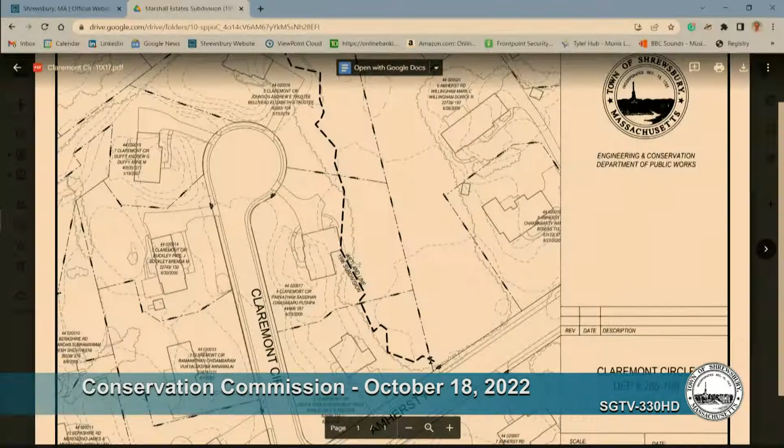So this is basically off the town GIS, but this wetland line, I found the original Mylars, and it did show that this is the wetland line on the original subdivision. They did do an order of conditions for the subdivision, but clearly they never came back and did orders for any of the houses, because you can see this is their house. In theory they would have filled wetlands to put it in, so I would say the original developer, if anyone was involved, didn't come in 1996 and get NOIs for the individual parcels, but the wetland line kind of follows what's out there.

Was there any instruction about a rock wall back then? No, there really wasn't a lot. The order of conditions talked a lot about wetland filling to build the subdivision and wetland replication, but there wasn't anything for this.

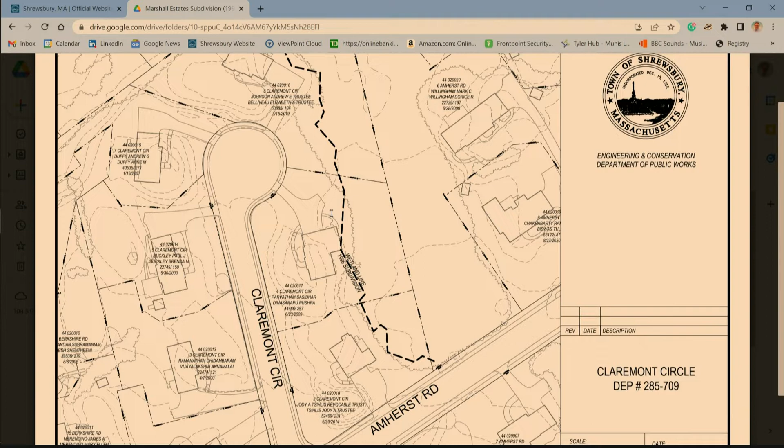Amherst Road actually crossed a wetland at the end of it. I think this was part of the Marshall Estates subdivision, and there were a couple of wetland fillings to put the roads in. This was recorded in 2000, so at this point I don't think there's been any further encroachment since the house, based on the aerials too.

So at this point, if we're going to make them file after the fact, we should really make number 2 and everyone else do it too, which seems a little excessive for 25-30 years ago. But is the current wetland line delineated with any rocks? Wasn't there a rock wall? Well yeah, number 8, they put in a rock wall, that's up here.

This actually matches very closely to what I think they delineated in the field, because if you recall, their swing set was right off the corner here, so they just clipped the corner of this wetland right here. So on this particular parcel, does it make sense to somehow permanently mark it?

I think we should make sure there's no further encroachments. There's already a wall at the edge of the clearing of the trees, but we might want to put our typical boulder requirement or some kind of marker to make sure there's no further encroachment.

Do you guys have any preference as to what? So you already have stone walls there? Only partially though. No, the full area has stone walls throughout our border, for the entire rear interior. And the wetland is on the opposite side, correct. The filing that we did will show it's full of stone walls from the original construction. I think Andy's saying the stone wall wasn't where that line is, though.

I can go out and verify if it needs filling in, if we want to make that a condition. Yeah, at least we should definitely make sure there's no further encroachment. The stones aren't just little things that can be moved, there's a substantial wall, but I'm happy to go over there and take a look, because I don't remember off the top of my head how far the wall goes.

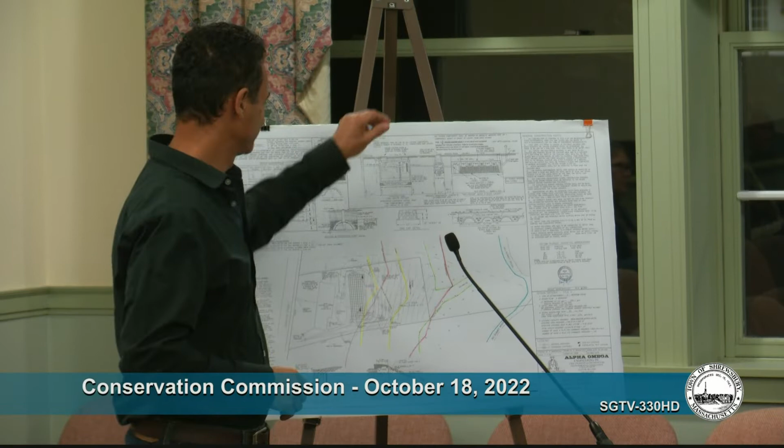Ready, John? Okay, 27 Bayview, here tonight? Anyone from 27? No. Looks like we struck out again. 314 Prospect Street, is anybody here? Andy, no one is here to represent 27 Bayview.

Okay, so 27 Bayview actually has a current order of conditions. That was for an addition to a house that came to us in May. I went back and checked the video, and we did ask them about the trees on the slope, and they said they weren't going to take them down. So I don't really think it's appropriate to do an RDA. They should probably modify the NOI if they want to now take all those trees down on the slope.

So you're saying right now there's an active order, they came in May for an order of conditions to put the addition on. Are you saying that they should amend it? I think they should, yeah, if they want to take all those trees down on the slope, because there's a fair number of trees. So rather than doing an RDA for this, I would issue a positive and have them amend it. I agree. Is everyone in favor that they amend it?

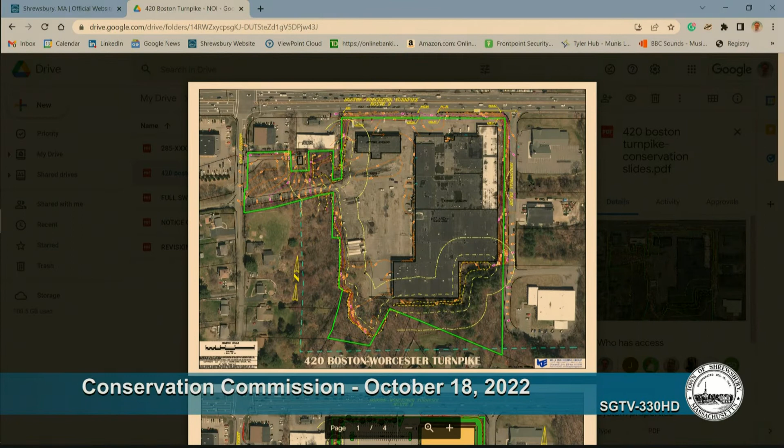I sent some slides in just to show what the project is. The property's located at 420 Boston Turnpike. Access is from Route 9 eastbound or from Oak Street. The property is about 13.5 acres in size.

Currently houses 2 significant buildings—one larger building's about 218,000 square feet, smaller building's about 14,000 square feet. Currently there's about 4.75 acres of pavement and approximately 250 lined parking spaces. McGovern Automotive Group has purchased the property, actually probably around a year ago, and we started working on the project.

We can flip to the next slide. We started working on the project to raze about half of the large building and the entirety of the smaller building, and place McGovern Collision Center in the remaining portion of the building.

At the time we started working on it last winter, you'll see 2 buildings on the plan. The lower one would be the McGovern Automotive Collision Center that has been there for a while.

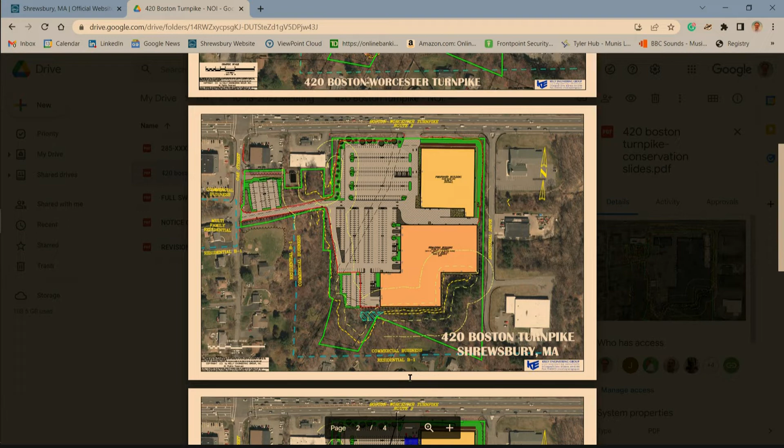Our first plan had left a retail pad, just a gravel or grass space, and Floor & Decor came along in the spring or summer, I don't know exactly when, and we've revised all of the documents. I think we were here maybe for an RDA just to do some demo. The commission said file an NOI for that, which we decided—just file an NOI for the whole thing.

So the project as redeveloped—again, the property is about 13.5 acres. To redevelop the project, we were able to do a few nice things and pull some pavement back. It's an impervious reduction at the property. A little bit less building, but there's a little bit more pavement.

We've shown all the buffer zones. We did get the comments from Graves Engineering working with the planning board, and also comments from Andy working with the Conservation Commission. We've been able to make a little bit of progress on some things related to stormwater management and what we were going to do. We had proposed something, but why don't we talk a little more about it before we get to the next slide.

The property has some wetlands out by the street that are shown. What's on this plan is the wetland delineation, the 30-foot no disturb policy, and the 100-foot buffer zone. On the left side of the upper parking lot toward Route 9, we have some buffer zone work. Down at the bottom of the page, there's a wetland that appears to be the legacy of poor grading or poor construction. When the building was originally built, water ponded against the building, and there are wetlands within maybe a foot of the building, maybe closer.

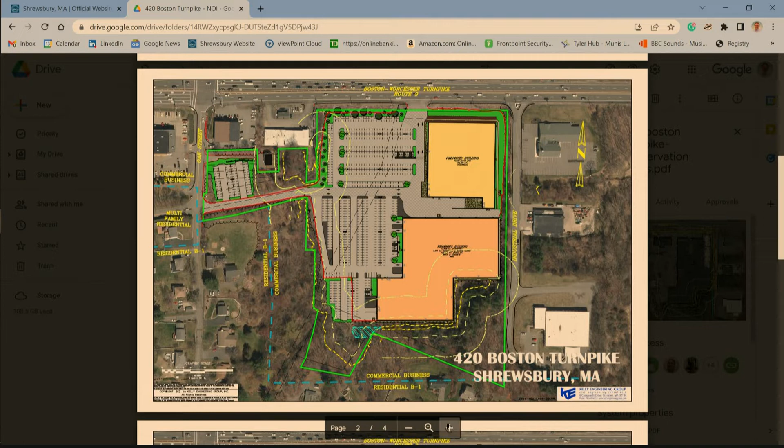If we go to the next slide - there's a redevelopment project: knock 2 buildings down, leave half of 1 building, and build a retail building. The site's going to get fully redeveloped. There's some significant town drainage coming through the site now. The site will get completely redone - it won't be all regraded, but all new drainage will connect into the existing drainage and will ultimately be in accordance with the new local stormwater management bylaws, a significant improvement.

If we can go to the next slide - when we first filed this, we were going to try to mitigate one of the things the local bylaw strives to get, which is phosphorus reduction, which we can't get in water quality devices. So we were going to propose some recharge areas. After we made the filing with the planning board, we got together with Graves Engineering, Jeff Walsh, and my associate Garrett Horsfall. They went and did some test holes out at the site. The test holes weren't very favorable to groundwater recharge - a lot of fill and poor drained soils, high groundwater.

So after that, we scratched our heads a little bit and pulled together a meeting. David Kelly and Garrett got on a meeting with Andy, and we chose to go for a different route, which we're investigating now - trying to find products that can help hit the target of 50% phosphorus reduction for the redevelopment portions and 60% phosphorus reduction for the new development areas. Since that meeting, about 3 weeks ago, we've been reaching out to various vendors to see what products can hit those targets, and we're working through those things now. We've got some initial input and reached out to other companies. We're still working on revising our drainage system to go from groundwater recharge to meet the phosphorus metric using proprietary devices.

And if you go to the next slide, it's gonna be very similar. Oh, this is the plan that was generated for the enforcement order. So very similar, we have a zoomed-in area. We're gonna create a plan that looks very similar to this. We'll just have a different location as opposed to filling it. They think they filled a lot more. Ours will look a little bit different and be very similar plans.

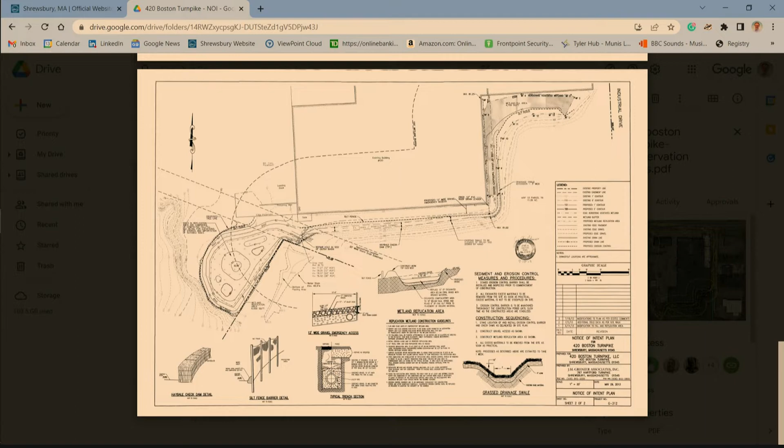So we'll provide a plan that will show some grading. Our protocol that's within the notice of intent was for plantings to be overseen by the wetland scientist and to just kind of do it on the fly. We don't have a problem putting a plan together. John will help us. We'll site some of the plants, and then when the order comes out, he'll go out and work with the landscapers and get them all placed.

The big thing when you're constructing a wetland replication area is to get the hydrology right. And sometimes when you put elevations and grades on a plan, they build it to the plan without the adjustment of the wetland scientist. So you end up with a puddle, or you end up with a dry replication area. So that's sometimes why we give a narrative protocol without a specific plan, to force them to ask the question of the wetland scientist, how do we build this thing?

So that's sort of the approach we've taken, but we can put together a plan that—the order has to specifically state it needs to be supervised by the wetland scientist, and the plan that's prepared needs to have the caveat in it that indicates the final grade is subject to the decision of the wetland scientist in the field with regard to the hydrology, where you set the bottom of the area. Because if you set it too low, it's going to be too wet. If you set it too high, it's going to be too dry. And sometimes it's a matter of this much.

You had said that there was going to be an overall reduction in the impervious area. Yes. Do you have numbers for that? I do, they're right in the stormwater report, but I think we're going to net out at—did I not write it down? I think we net out at about 30,000 square feet. I brought a small version of my stormwater report. It's right on there. So the total change is approximately—increase in pervious area or reduction of impervious—about 11,800 square feet. So it's about 12,000 square feet, a quarter acre or so, net.

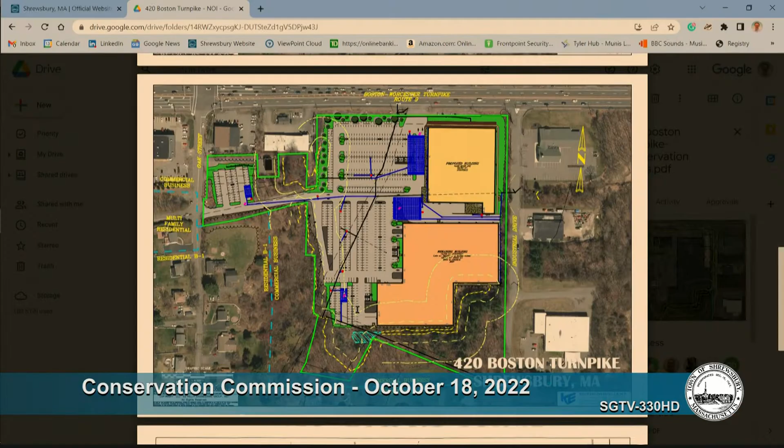You're going to capture that roof runoff and pipe it into some type of a basin? Well, on the southerly part, there's actually kind of an intermittent stream drainage swale. But the water that's in the angle behind the building can't get to it because it was not graded out. So it's all ponded up, and it eventually overflows to that swale, but it's also higher than finished floor when it gets there. There's probably water getting in the building. Yeah, and there's a drop inlet at the end of the swale.

Just before the replication area, it's going to be similar to the wetland that's in the elbow of the building, and there's an intermittent stream that comes from the back corner of the building up to where the replication area starts.

There's a drop inlet that goes into the drainage system on the site, probably discharging to the stream. There's like 7 or 8 culverts coming out at that headwater next to the site, so there's some municipal or regional drainage that comes through this property and discharges to some head walls and leaves the property. Ultimately, everything winds up in the Quinsigamond.

So we're kind of at the intersection of 2 or 3 off-site drainages that come into this property, and they all combine right in that similar area.

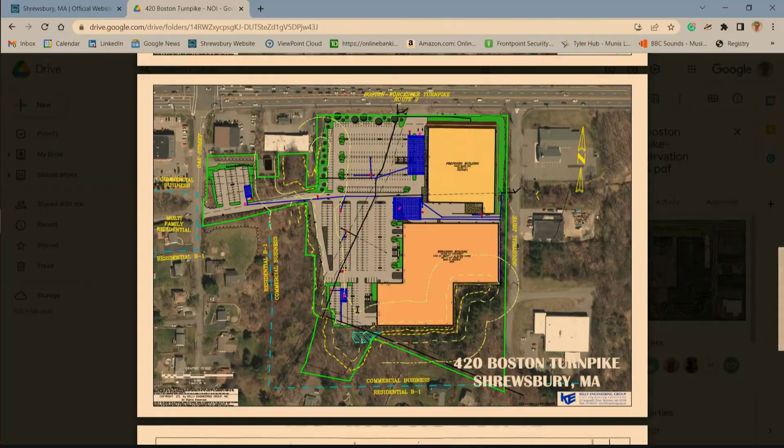What we plan on doing is enhancing a 10 or 20 scale plan to give the appropriate detail, as you requested, which would probably include a cross-section if we have to raise the grade a little bit to hit a door threshold. I think building code will require all the landings to be at finished floor as opposed to stepping out.

So I've taken a look at the architectural plans. I think when we get toward the back, they're coming up 2 steps to get out. I think that's what's there now.

So we appreciate that comment and have been looking at that. You'll get a plan similar to the enforcement order plan, with a little less work than that one, because I don't think we need to push it out so much. They were going 12 or 15 feet out, but working with the fire department, I think we just need a 5-foot walkway.

Chris, are both buildings going to contain auto repair? No, the second building is gonna be a retail store for Floor & Decor. That's where I was confused. So which building - if I'm looking at the yellow or the orange? The front one, the yellow one, will be the retail building.

Okay, so presumably there would be oil, fuel, things like that stored here. Where is that going to be in the building? Everything would be in the building, and we can get you the floor plans. What part of the building would it be in, and would it be secondary containment around it? There has to be - it's all building code, the codes have all that captured for all of those things, and that's a good point as well.

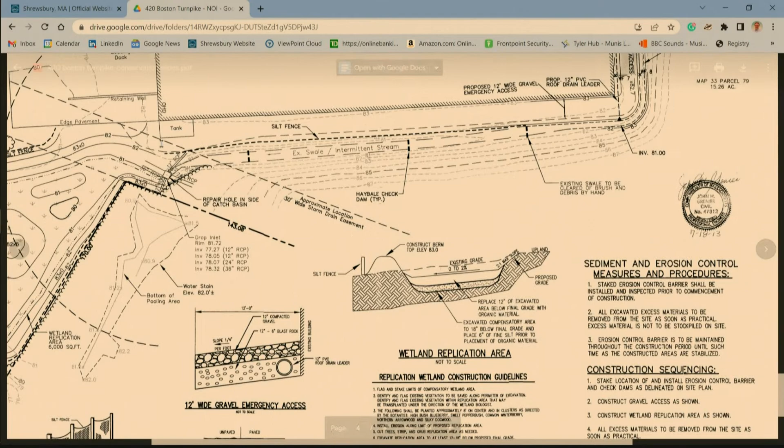On the bottom of the existing pavement, it has a pad that says tank. What tank is that for? It's on that image Andy has on the screen. I think it's an above ground tank, not on the new plan - near the replication area. I don't think it's on the new floor plan, it's an above ground tank of some type. That's what I was getting at - that's exactly what I was asking about. I don't see it on the other plan. I had to squeeze by it a few times to flag the wetlands and make the observation, so there was something at that corner.

I don't know when they did the enforcement order - they were probably continuing to use the building as is. The building's gonna be completely renovated, so I will double check the floor plans, but I didn't see it on the floor plan. It'll be a walkway right through that area.

One other thing regarding the proposed replication area - we're not just constructing it, we're also constructing a band of upland on the development side and on the far end where grading has to occur. So we're not just carving out the wetland, creating it, and leaving it open to the development. There's going to be upland saplings and shrubs planted on that side and that side of the replication area, encapsulating it with upland, as opposed to just throwing grass seed on the slope and calling it done. There's going to be woody vegetation in that area to protect it from the development.

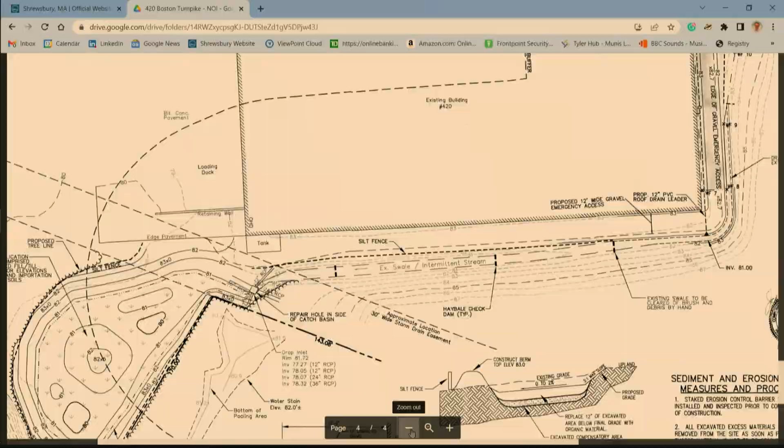So that's all in the narrative as well, and that'll have to get shown in your plan when that gets drafted. Why don't we see if anyone in the public has any questions or comments tonight? Does anyone out there have any questions or comments on this hearing? I don't see any. Any more questions from the commission tonight?

You think you're gonna be back next month on the agenda? Does this commission meet every two weeks or once a month? Once a month. So we'll continue this public hearing until our next meeting, the 15th, 2022. Perfect, and we'll hope to work with Andy on all those items and get everything up to par before then. Beautiful, thank you for your time. All right, thank you.

Thank you for taking those PDFs, we saved a little bit. Oh, no problem, saved ink and paper.

Andy, what would you like to do? We've got enforcement orders, but I was just thinking we've got representatives here for item D under new business, the CPC application for the Trails Committee, so maybe we'll do that. And then we've got one resident for a new enforcement order for 29 Redlands. So if we get those out of the way, then we can do the rest. All right, so let's skip down to item D on our agenda.

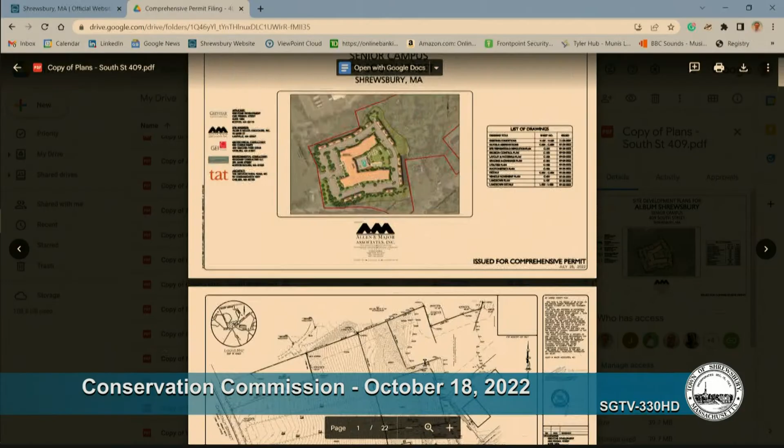What's that about? Let me pull it up. So that's a 40B that's being submitted to the town. They're not doing any work under our jurisdiction, but the ZBA was just looking for comments if there were any. Let's pull up the site plan—this is at the corner of South Street and Route 20, just down the street from Adams Farm.

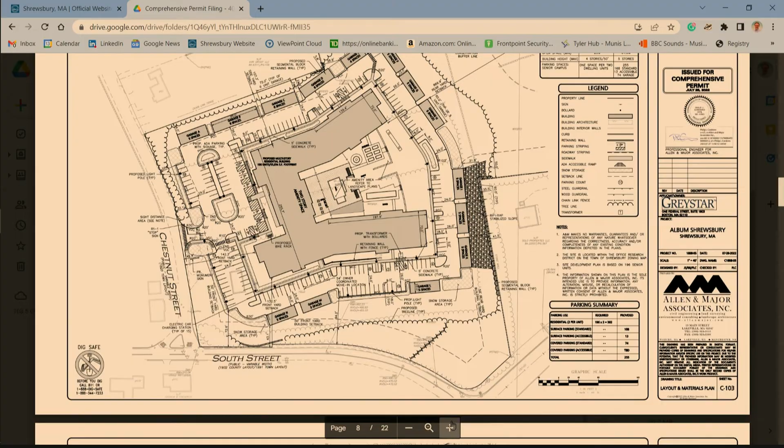It's a fairly large development—how big is this one, Andy? It's like 196 units, something like that. It's 5 stories. It's a fairly big project, but it's going under the 40B process. There are wetlands—I'll go back to the existing conditions. There are some big wetlands in the very back corner, but their work is all down here, so there's nothing jurisdictional, probably no comments, but they just wanted me to present it to you if you had anything.

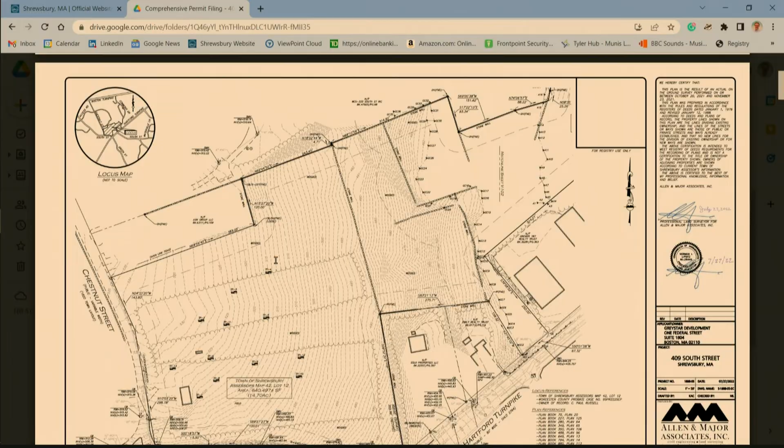All right, how about the next one—review and comment, ENF filing, Interstate Crossing Industrial Park. Yeah, this is the old Worcester Sand and Gravel site.

Other site plans—like the site plans are at the end. Nope, don't have the site plans. Alright, let me figure out what I've got to do with them. Yeah, but I thought I copied it over, there should be just a pretty rendering, and I was trying to find it. I know I downloaded it. I thought maybe it was at the end of the ENF. Let me see, maybe I just never downloaded it or uploaded it.